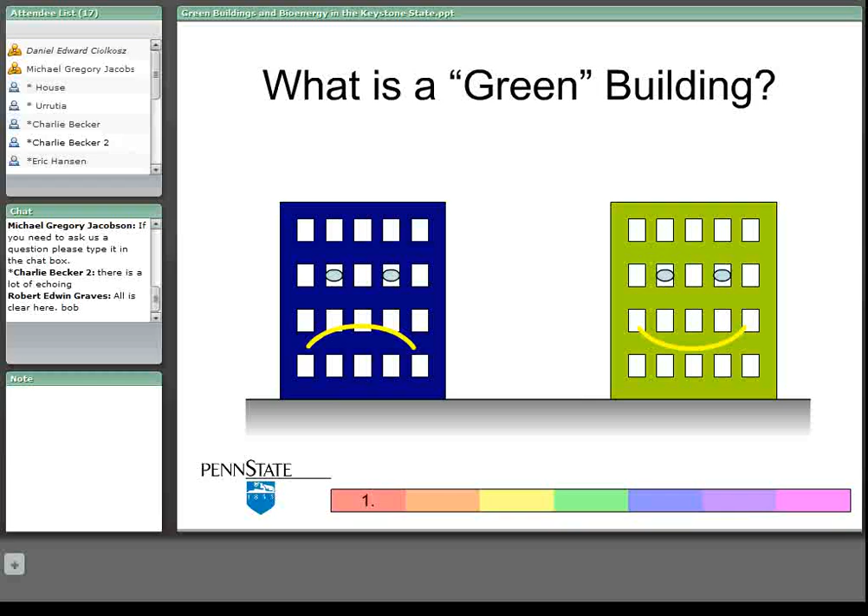In general, it tends to break down to 4 main themes. The first theme being the building site. Can we design the building to enhance the local ecosystem and encourage the use of public transportation? And that's kind of a funny one to jump in there, but the idea there is that excessive transportation requirements and excessive use of vehicles is in general a detriment to the ecosystem and the community in general, and I think that's probably a reasonable statement to make, although I find it very frustrating when there's not ample parking at a building, but that's maybe my own issue.

So moving on, the second area, building materials. Can we select renewable, recyclable, non-toxic materials for the building so that over the lifetime of the building there are less issues there? Thirdly, building systems. Can we design to minimize energy waste and maximize the use of renewable energy without reducing the quality of the building services that are provided? And then lastly, occupant health. Can we design to provide healthy conditions inside that building? And when you look at that, really, that's mostly just common sense for good building design.

But unfortunately, it's common sense that has been used all too infrequently in the building industry in the generations gone by. And so green buildings often is simply a replacement term for good building design, right? Now, something as complex as sustainability for a building, it's difficult to distill into a single numerical scoring system, but people being what they are, that certainly hasn't stopped us from trying to figure out how to come up with a single metric or way to measure how green or how sustainable a building is.

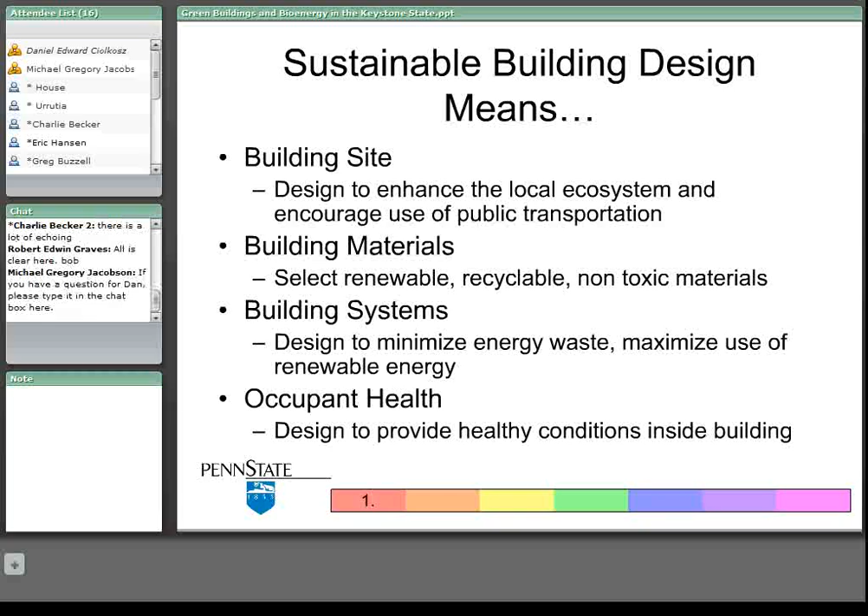And by far the most successful rating system in the United States, and in fact it really is the de facto standard, is the LEED rating system. And LEED stands for Leadership in Energy and Environmental Design. And that's kind of an interesting name because the implied assumption here is that energy and environment is what sustainable buildings are all about. And of much lesser importance are the issues of economics and society and the sustainability of those sides of sustainability. But that's a little bit of an aside, but it's certainly worth thinking about in terms of how buildings should be designed and built in our country.

Now, the LEED rating system was developed by a group called the United States Green Building Council, and they've developed this certification system, which is a very thorough process of taking a look at the design and construction of a building and allocating a certain number of points, or green points, to that building. And if the building gets a minimum of 40 points, it is certified to be a LEED building. 50 points, it's given a silver, 60 a gold, and the highest rating would be a platinum rating, which is 80 points or more on this scoring system.

Now, again, it's interesting that they used silver, gold, and platinum. Why not different shades of green, for example? But I suppose precious metals still hold a much stronger grip on our collective psyche than the colors of different leaves and grasses and things.

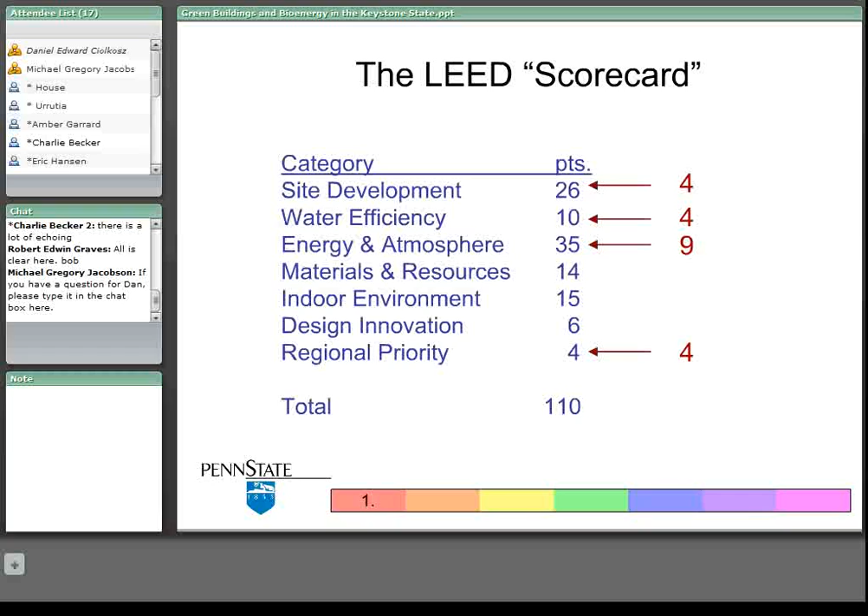Now, how much does this all cost? People have analyzed the cost of this LEED rating system, and it really varies widely. It can be as high as 40 or 45%, a 45% increase over normal construction costs, but typically it's somewhere in the 5 to 10% range in terms of increased cost. And of course, the operating cost of these buildings tends to be lower over time, so you have an opportunity to recoup that.

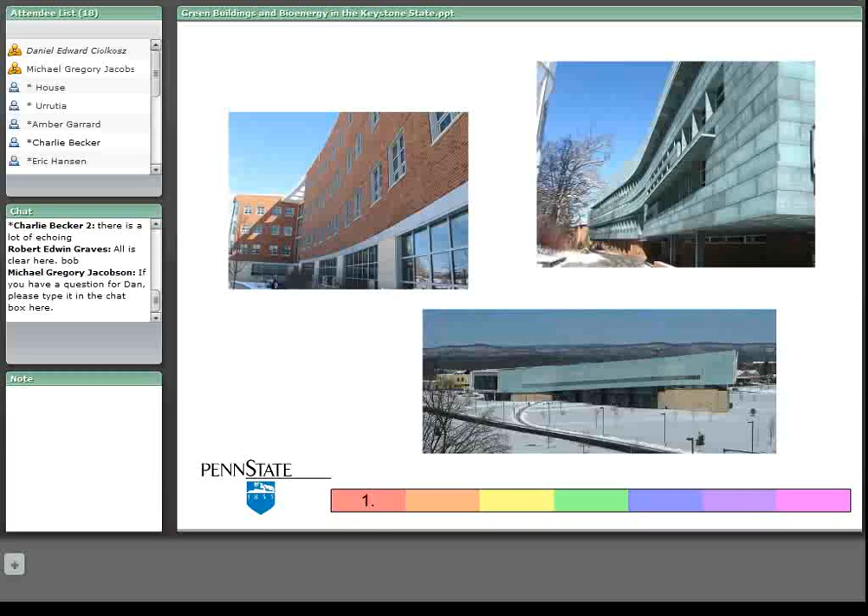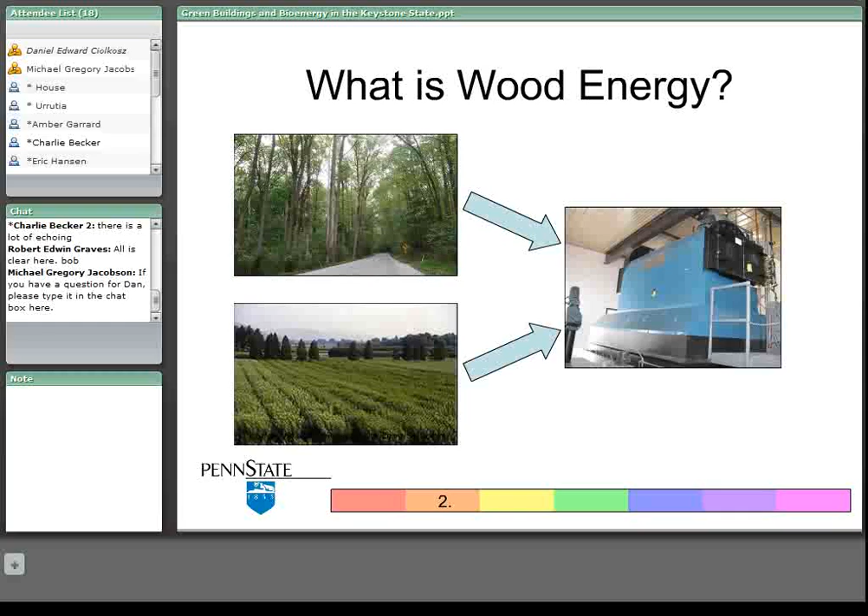Now, practically speaking, the most common fuel type would be commercial grade wood chips. They are economical, they are widely available, and they are in use today. However, there are other forms of wood fuel that may be possible, most notably wood pellets, and we're seeing some growth in commercial use of wood pellets, and larger densified products such as briquettes or cubes, depending on how they are manufactured. The most common form of utilization of this fuel is direct combustion to produce heat. There are some other variations of that, but in terms of how wood energy would be used in a building, this is pretty much the standard.

Now, sometimes people like to use the word bioenergy instead of wood energy. The main difference being that bioenergy could potentially incorporate non-woody fuels, such as field crop residues or perennial grasses and things like that. But in the Northeast United States, wood certainly is the most common and affordable option for bioenergy, and it will probably continue to be the dominant fuel source for many years to come.

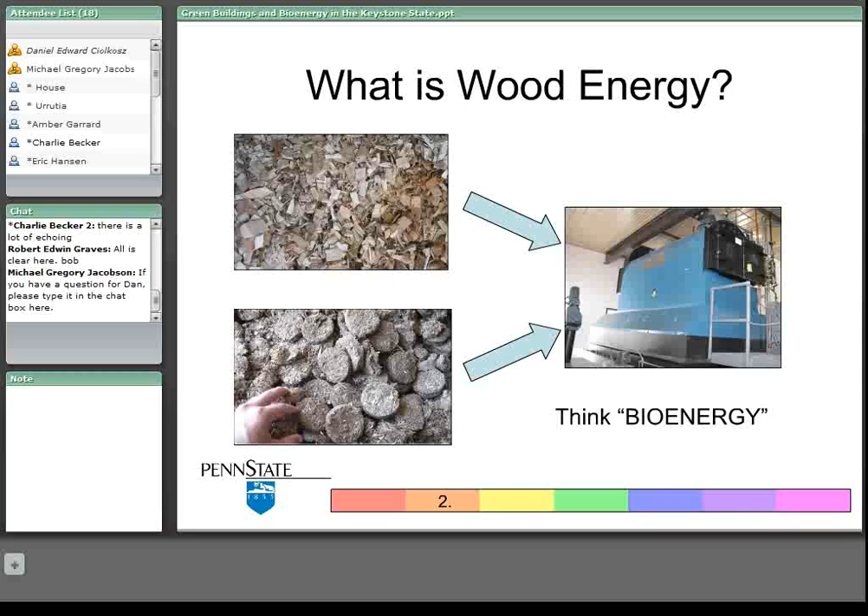How can this work practically in a building? There are several ways that wood energy can be incorporated into a building, and the most common approach for commercial buildings is to use wood combustion to generate hot water for space heat. Fuel storage is an important component to the system, and it's one that many building designers are not really familiar with. But the manufacturers of the combustion systems typically bundle fuel handling in with their equipment, and that helps simplify the process of incorporating that into a building.

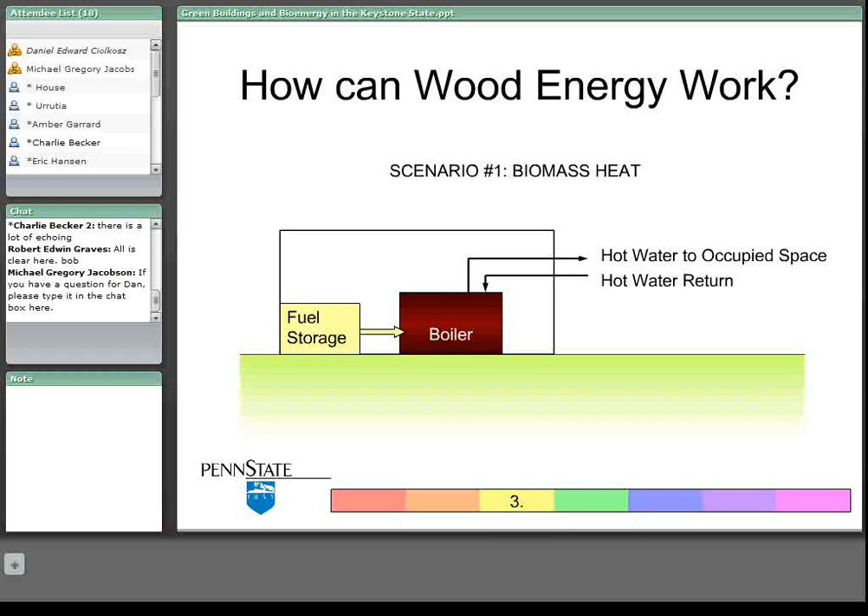The second common configuration for wood energy in buildings is to utilize wood combustion to generate steam. That steam provides both heat and power simultaneously to a building. Basically, the steam that is generated is fed to a steam turbine. It spins the turbine, generates electricity, and the steam that comes off of that turbine at a lower pressure is then provided to the building or is turned into hot water depending on the building's needs.

Okay, this is not quite as common as a heat-only system, and typically it's only really practical for larger buildings or collections of multiple buildings, and the cutoff point is a little hard to determine. It depends on a lot of factors, but it's somewhere around the 500,000 square foot range. So that's a really, really big building or series of buildings that you need if you're going to consider providing heat and power through a steam turbine.

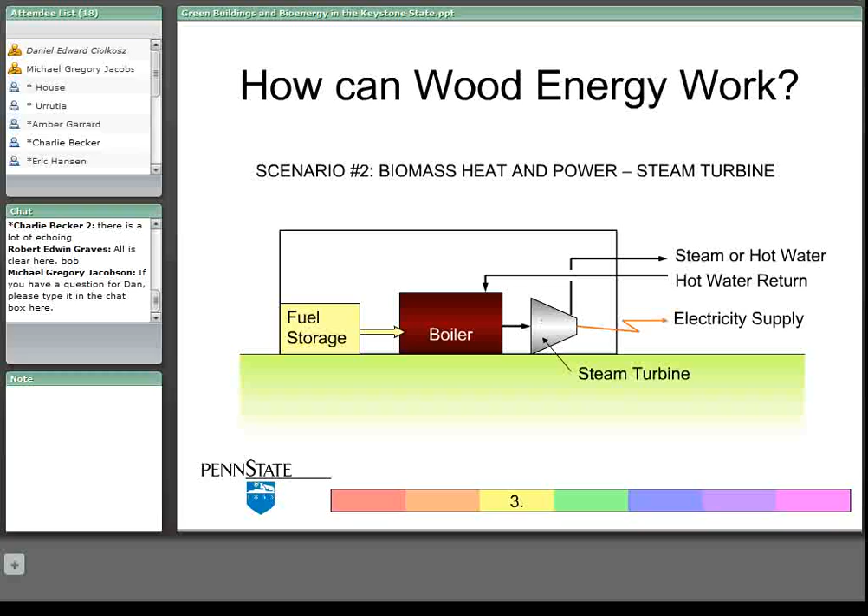A third scenario that I wanted to bring up, not because it's really used, it's pretty much untested in the United States, but there has been some successful implementation in Europe, and maybe it has some potential for the future, is the use of an Organic Rankine system to generate heat and power. And it's just a little bit of a variation on the steam-based combined heat and power system. But because the Organic Rankine generator is not utilizing steam directly, it avoids some of the maintenance costs associated with steam-based systems.

And so because of that, it might be suitable for some smaller facilities than are usually candidates for combined heat and power. But the cost effectiveness of all this is kind of uncertain at this point. Okay, but it is an intriguing possibility that might make sense in the years to come.

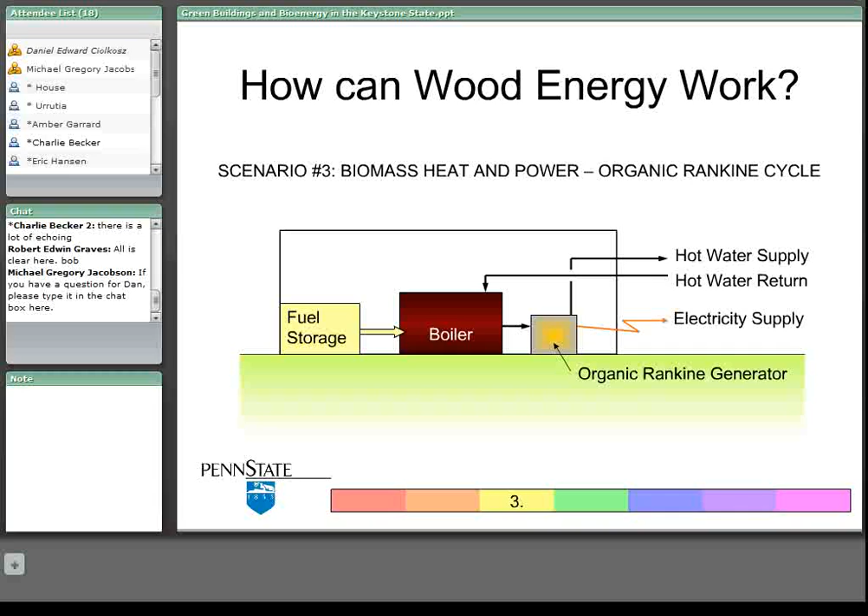So we've seen how wood energy can work, how it can be slotted into a building. Now, the next question then is why? And there are several good reasons or several good answers to that question. Right? The first is that you have the potential to significantly reduce or even eliminate your building's dependence on fossil fuels. And for a green building, a sustainable building, that's a big deal.

Take a look here at these pie charts that show energy use for two different buildings. They are both LEED rated green buildings. The one on the left does not use wood, and the one on the right does use wood. And the one on the right, the folks really kind of went hog wild with a bunch of different local energy generating technologies. But take a look at what's providing the largest portion of that building's energy on the right, and that's wood. It's wood energy providing 41% of the energy needs.

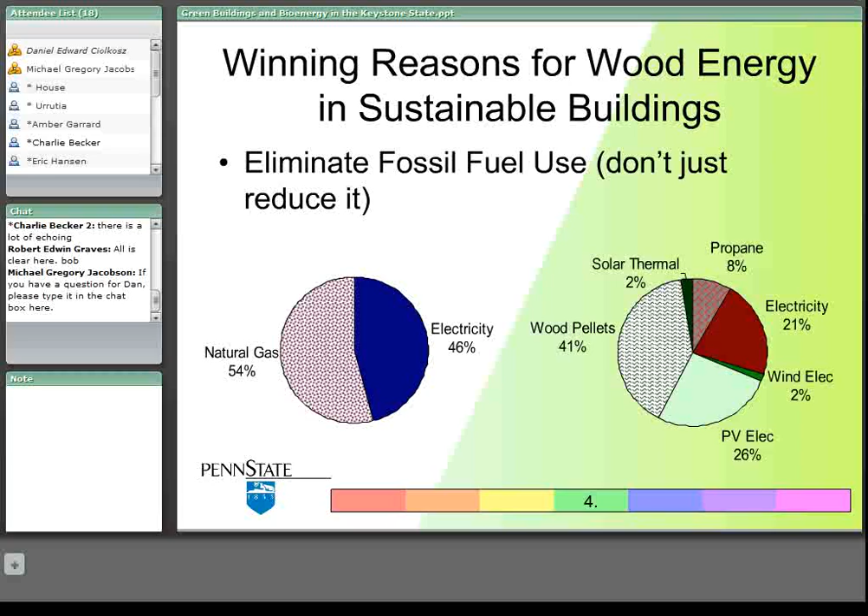Compare that to the building on the left, where more than half of the energy is coming from natural gas, a fossil fuel, and then over 45% is coming from electricity, which, depending on where they're buying it, may or may not be from a renewable source. So wood energy has real value there in terms of reducing fossil fuel dependence for these buildings.

The second reason, right, you have the opportunity to match the supply of energy to the demand for energy in the building, and not the other way around. This is a real problem with most renewable energy sources, that they produce energy unpredictably at times when it is not needed. Now take a look at the two lines on this graph.

The red line, and these are actual measurements, the red line shows measurement of a photovoltaic array, the amount of power that was produced on February 22nd, that was Tuesday, right, over the course of a day. From midnight, rising up through the middle of the day. Some clouds showed up in the afternoon. The red line drops down in the hours of the afternoon, then back down to 0 in the evening. Superimposed on that graph is the relative power use for a building that we measured on that same day.

And you see that those two graphs don't nearly have the same shape, so that it's impossible to directly utilize, for example, photovoltaic power at night when the sun is not shining. And of course, that's kind of obvious, but it points out the issue that's a real challenge with a lot of renewables, except for wood energy, because wood energy systems can be ramped up and ramped down to meet the demand and meet the needs of the building, which is a very nice thing.

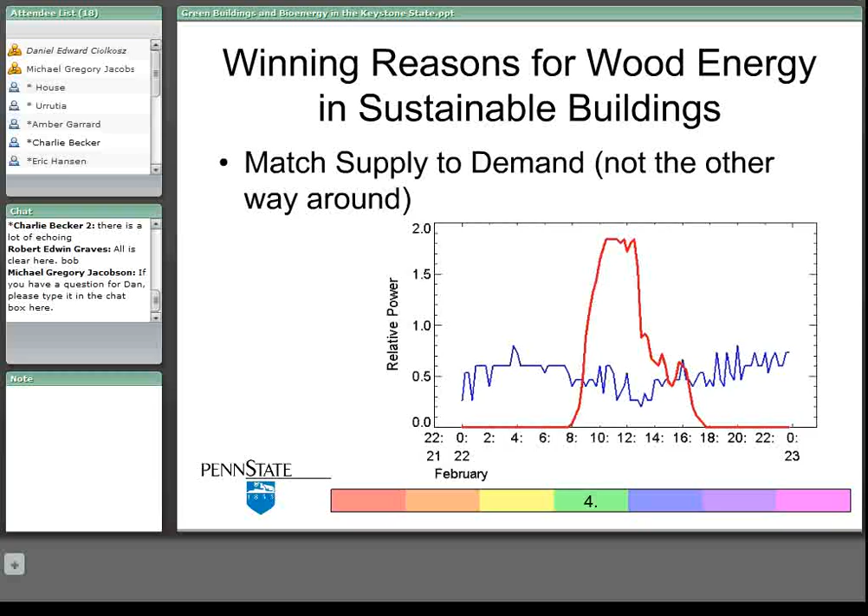Let's suppose we decide to build a building here, a nice sustainable building that uses wood energy. What are the potential things that can be happening there? We have the potential to produce the fuel on site in a manner that not only provides local renewable fuel, but also enhances the local ecosystem by way of providing habitat for flora and fauna, plus water quality benefits as well, if it's all managed properly. Now, this is truly a facility whose energy use is integrated with the local ecosystem, and that's something where bioenergy and wood energy is probably unique in terms of what it can bring to the table for sustainable buildings.

The fourth reason I want to bring up, and it's the final reason I'll mention today, is that wood energy is proven, it's reliable, and it's cost effective. Once again, these are nice things to bring to the table when we're talking about design options for a building.

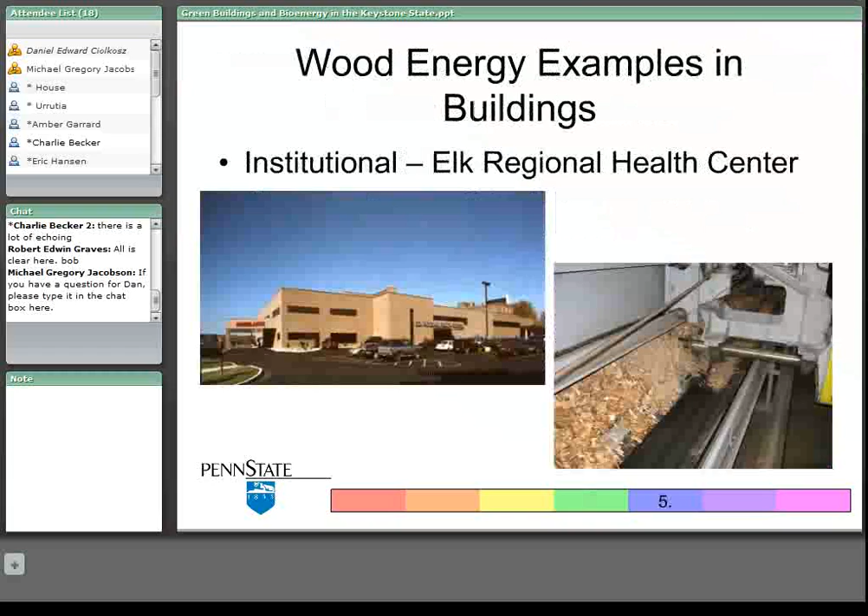Residential example, the Bruderhof community in southwest Pennsylvania. This is a residential community where people sort of live together and work together, kind of a communal living setup. They installed a wood heating system in 2008, and all of their buildings are heated by hot water that's provided from a wood-fired biomass system that's there on site. Again, working well. It's a nice design solution.

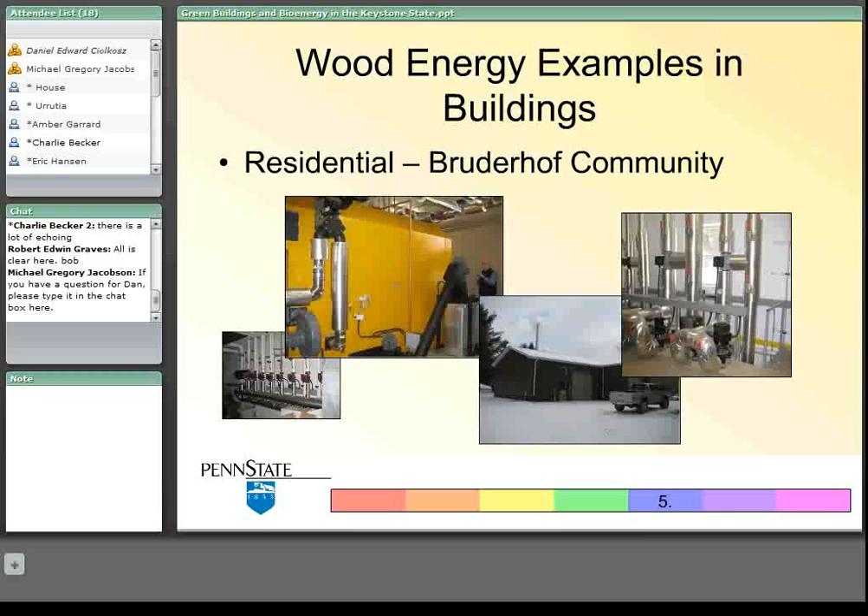Third example, an industrial example, Evergreen Community Power in Reading, Pennsylvania, in a fairly developed urban/suburban location. It's a very large facility that supports an adjacent corrugated paper plant by generating 30 megawatts of electricity and providing steam for the manufacturing plant, allowing that plant to be economically better off and also be able to market their products as being produced using sustainable renewable energy. They have 27 employees taking care of that plant, and they utilize wood and construction debris as their main fuel at this point in time.

And what's interesting to note is that, at least in Pennsylvania, none of these projects are LEED-rated green buildings. And so you have to wonder if maybe the interest in green buildings could be a very nice motivation, continued or increased motivation for wood energy, possibly replacing or augmenting the financial motivations that have been predominant up to this point.

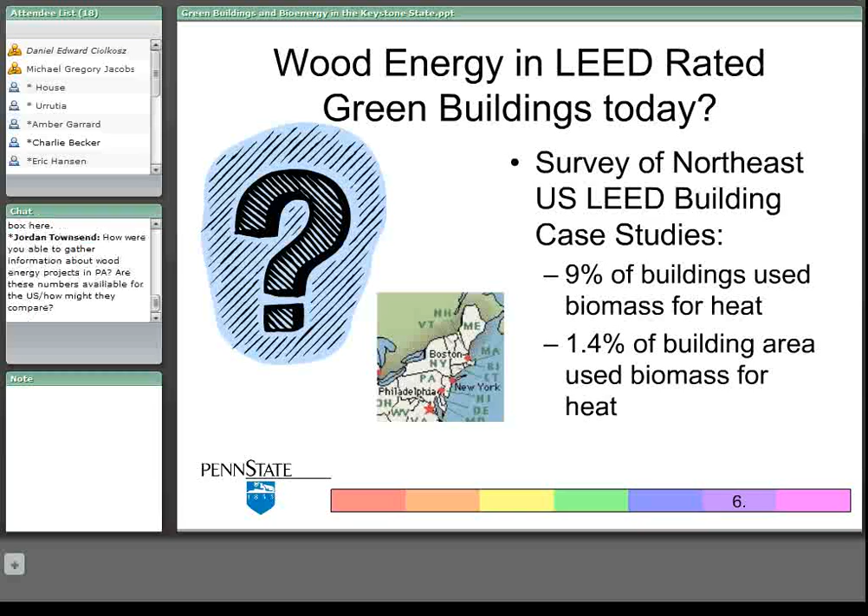Now, a study was recently commissioned by the United States Forest Service to ask that exact question by surveying and talking to building designers and asking them about wood energy and why they do or don't utilize it. And what came out of that study is that probably the biggest answer is that the design community simply is not aware of wood energy. Typical quotes from that study were things like, "Why have we not heard this before? This technology can help us."

And to be fair, first of all, there are some things that wood energy equipment manufacturers can do better to make their equipment more easily utilized by the building design community. And there are some situations in some buildings where wood energy does not make sense. But the real take-home message here is that there is a grand opportunity to not only help the green building community, but also develop the wood energy industry as well.

And so with that in mind, I'd like to move on to my final point here, basically, which is that I'd like to challenge you to think about making a difference here. Here's a need, here's an opportunity. All right, it's a little bit of a challenge that maybe we should be thinking about how we can plug into this need and kind of bridge the gap between these two communities, the wood energy community and the green building community.

All right. By my count, there are 76 local chapters of the Green Building Council. And there's a real opportunity there to reach people who are really excited about sustainable buildings and give them an opportunity to think about how wood energy may fit and may meet their needs. Okay? And the whole idea is that a lot of wood energy projects historically have happened because there was a local champion, someone locally who was excited about the topic and talked it up and got others enthusiastic about it.